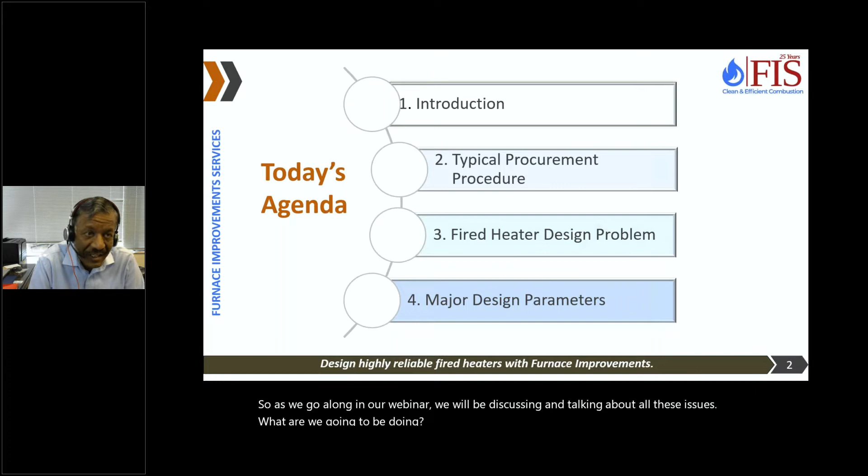So what are we going to be doing today? We'll talk a little bit about introduction, talk about the typical heater procurement procedure, and then we will talk about a real fired heater design problem. We will take a real fired heater design, and I will talk to you, and we will discuss the major design parameters, and then we will move ahead with that design, how we come up with the design of the heater.

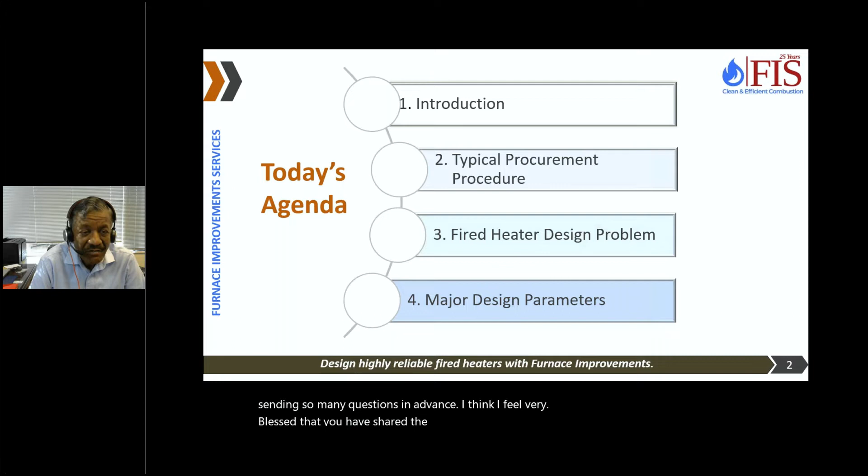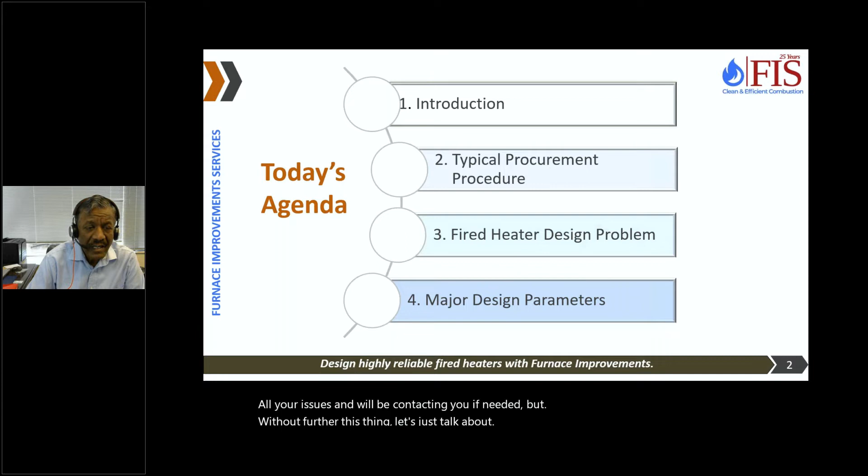All your issues, and we will be contacting you if needed. But let's talk about how the heaters are being procured today in most part of US and the world. So typically when you have a project, most of the projects are carried out by big EPCs, engineering companies, and they sometimes hire licensors.

And they come out with a front-end engineering design package, FEED, as it is known in the industry. And that is given to the successful EPC, and they are asked to develop a plus minus 10% cost estimate. So the EPCs take the data sheets which are developed by the licensors or the client, or by EPC themselves,

and they go out to the heater vendors and get the preliminary cost estimates. And these cost estimates are then taken by the EPCs to develop the project estimate. Once the project is approved, EPCs take those proposals, firm up their inquiries, and send the firm inquiries back to the heater vendors.

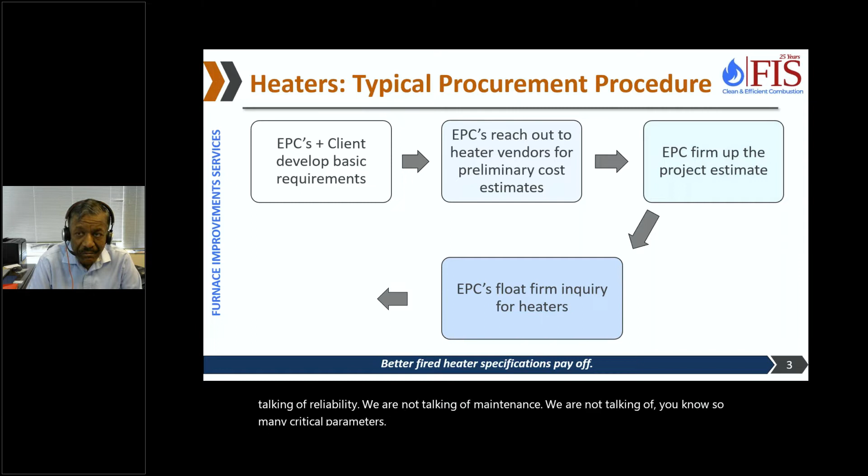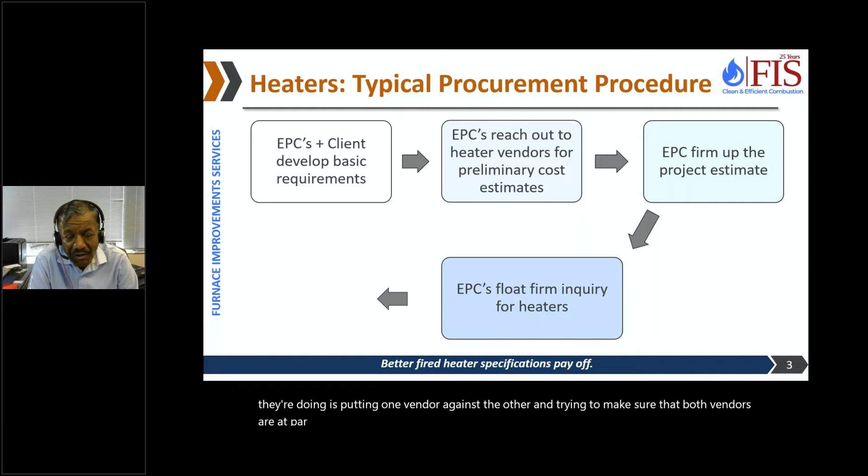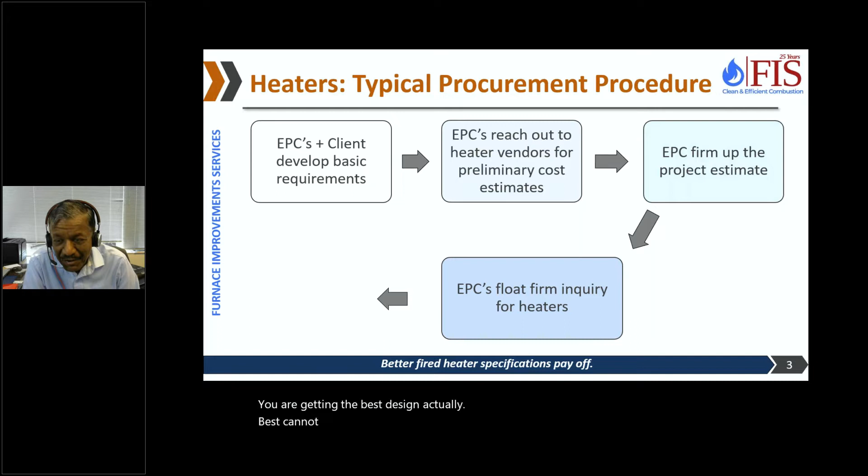And the most stress is on comparing one offer against the other. So typically what they're doing is putting one vendor against the other and trying to make sure that both vendors are at par. But that does not mean that you are getting the best design, actually, because best cannot be cheapest. There is no way, if you're buying a TV, Samsung TV is not going to be the cheapest.

So you have to make a compromise on the heaters, and then you end up paying recurring maintenance costs, which are much more as compared to the initial cost you save. So our approach is, get the design right the first time. Do it once, do it right.

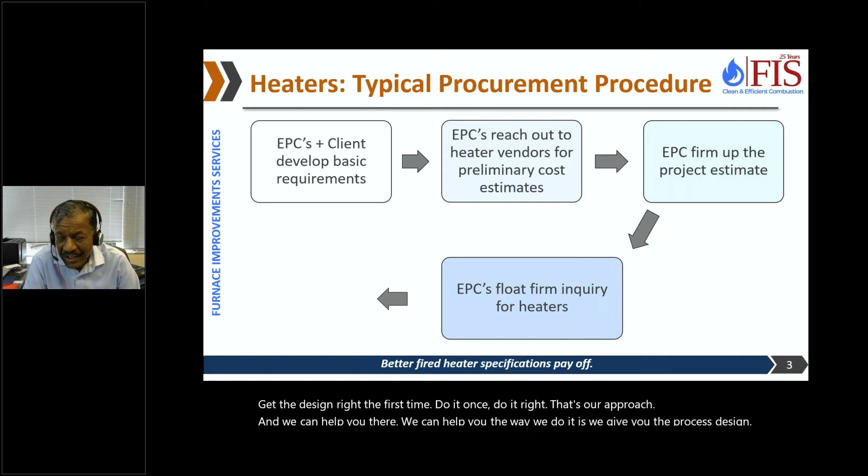That's our approach, and we can help you there. The way we do it is, we give you the process design, and then you can take it to any EPC or any heater company, and it will ensure that you don't get a cheap heater. You get the best heater for your money, actually.

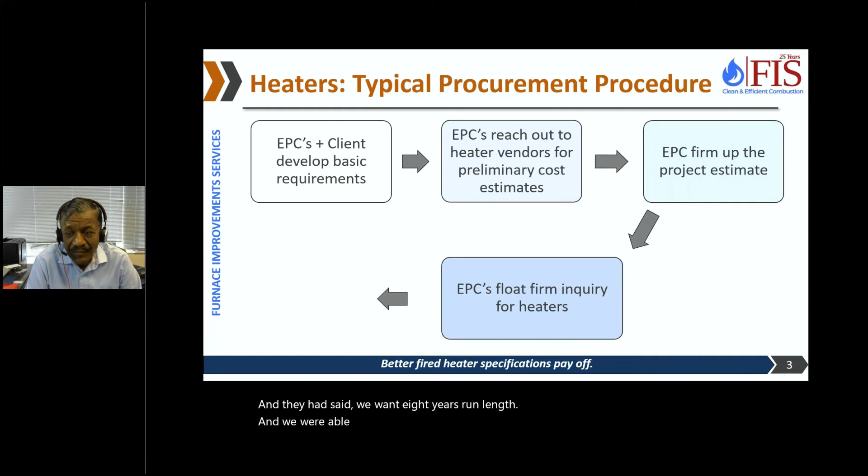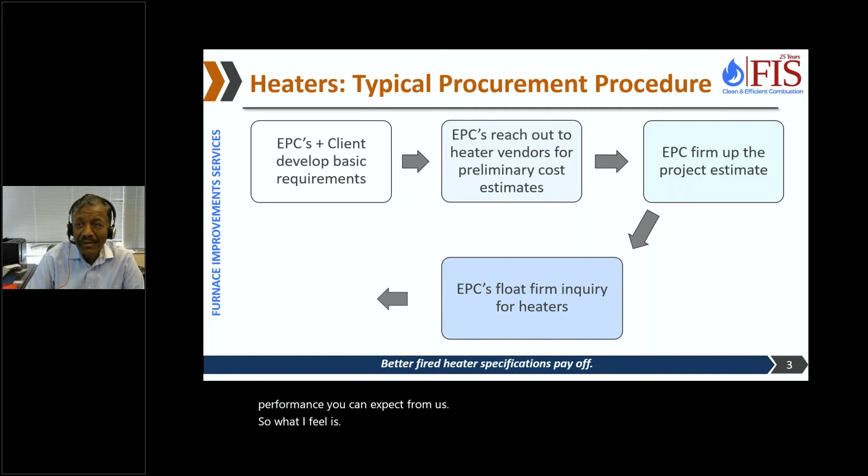We did a design for a crude and vacuum unit for Citgo, and they had said we want an 8 year run length. We were able to show them that the heaters ran for 8 years. That's the type of performance you can expect from us. So what I feel is, the procurement procedure needs improvement, and that's where we come in.

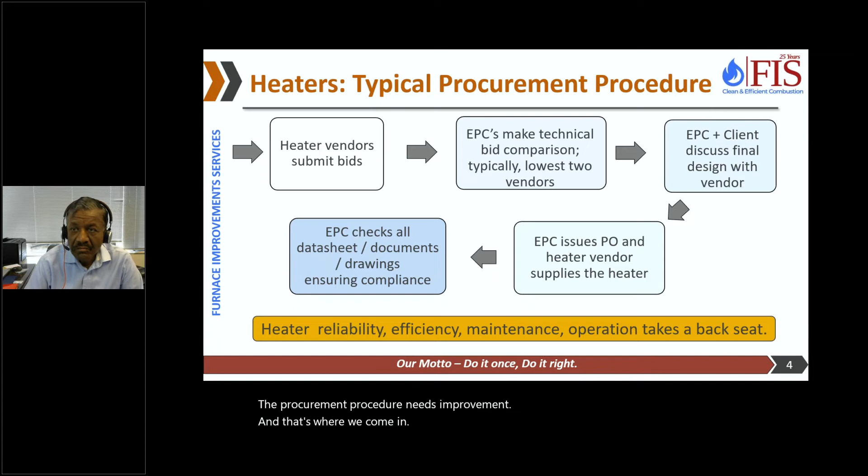So let me talk about our company, Furnace Improvements. We started in 1996. We have two offices, Sugarland, Texas, and a main office in Noida. The main office is where all the activities are taken care of. Our mission has been improving the performance of existing fired heaters. That's what we do for a living.

Basically, take your heater, improve their run length, improve the capacity, improve the efficiency, reduce emissions. Our model has been working directly with end users and owners, as we call it. It's a model which is like a patient-doctor relationship. We look at the patient and then we prescribe the medicine, and we have a very unique

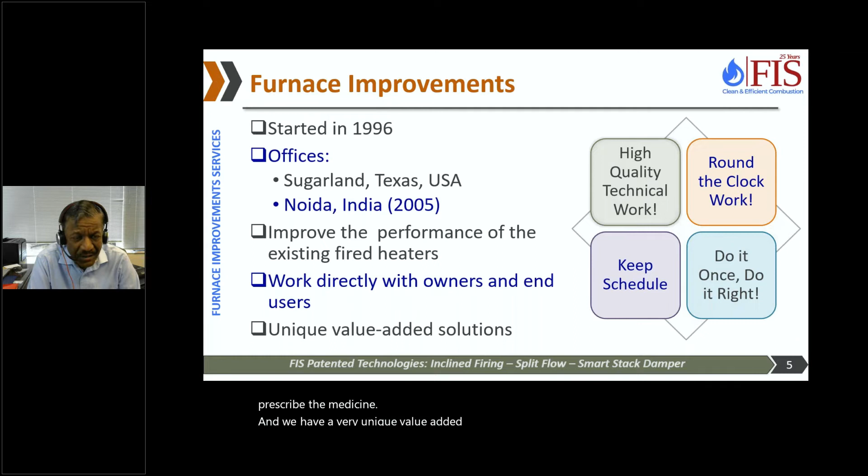value-added approach, and it is somewhat based on a contrarian approach. We challenge what has been done and why it has been done. So we have a kind of getting back to the basics and looking at the heater. If you give us a heater, we will look at the basics and see what has gone wrong in that heater. On that basis we have developed 3 patented technologies: inclined firing, split flow, smart stack damper. That's basically our approach to fired heaters.

And as I said, our approach is do it once, do it right. Because of the time difference, we are able to do the work around the clock, and we are able to keep schedules. We can do work schedules on a very, very fast basis.

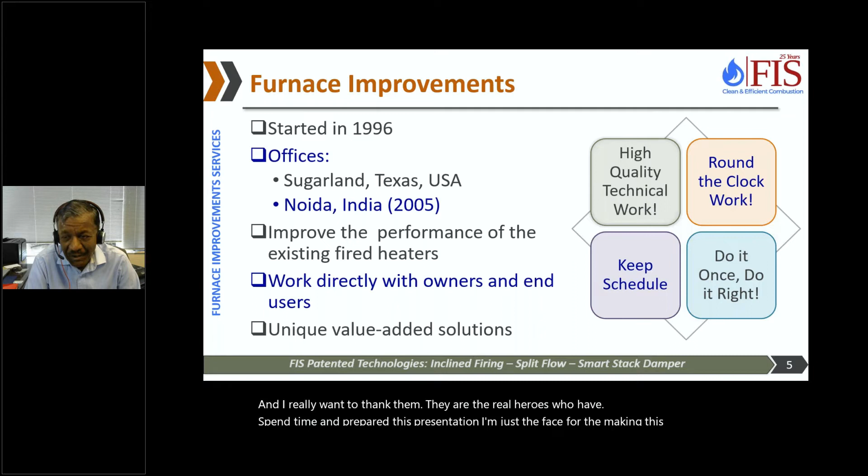As far as our capabilities are concerned, our forte is process engineering. We have in-house CFD modeling capabilities - I think maybe we are the only heater company with in-house CFD modeling capability. We do our mechanical engineering, structural design. We have SolidWorks for 3D modeling, and we can do your project from start to finish, all the way from design to erection. We can take the project.

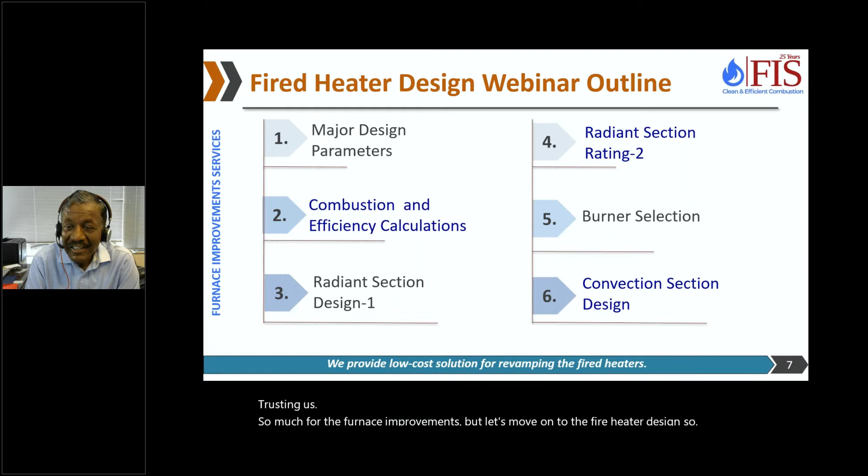Okay, so much for the furnace improvements part. Let's move on to the fired heater design. We want to go into details, and that's one reason I decided to break this webinar into 12 parts. We will start with the major design parameters today. Next month we will have it once every month, and that will give us time to prepare. It will also give you time to absorb and send us questions. You will need to register every time - we could not find a way that we could register you for all the webinars, so you will have to register it.

Next month, we will talk about combustion and efficiency calculations. Efficiency has always been on the back burner in the US, but now with greenhouse gas emissions, I think efficiency will play a very important role. We are already seeing many of our clients asking us to put their air preheater system back online, which had been bypassed for the last 20 years. So efficiency is an important thing.

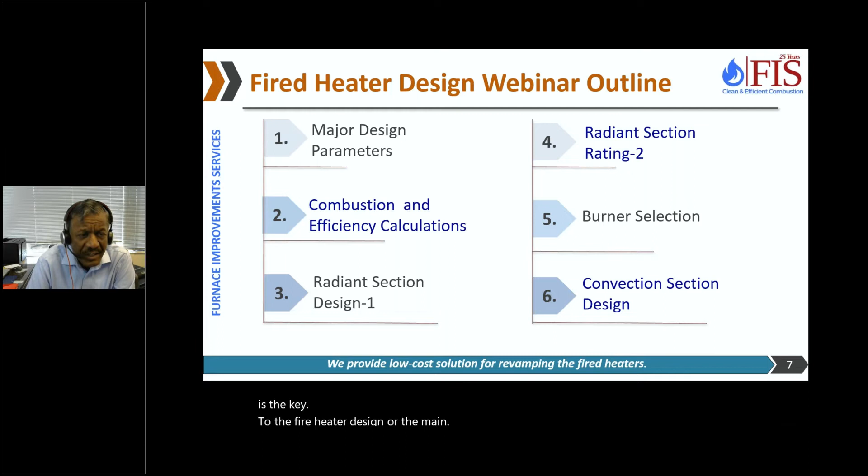Then in the third and fourth sessions, we will talk about the radiant section. We realized the radiant section is the key to the fired heater design - the major component in the fired heater is the radiant section. So we will take two sessions doing that. Then move on to the burners, I hope we will be able to finish it. Then we will talk about the convection section.

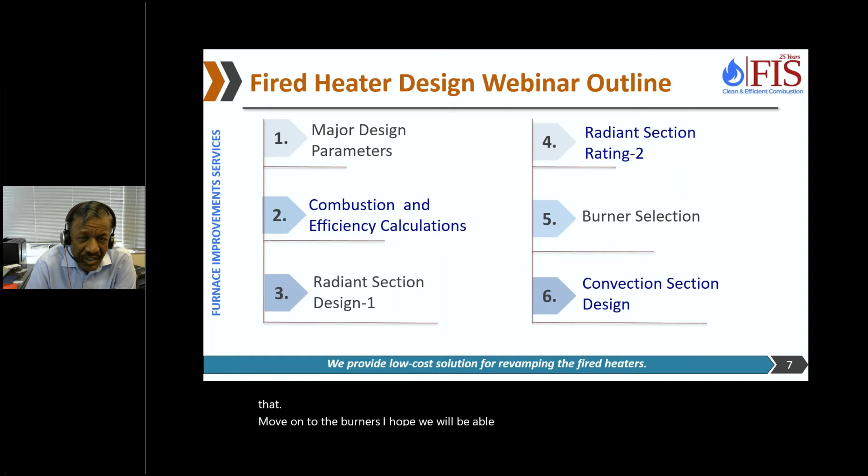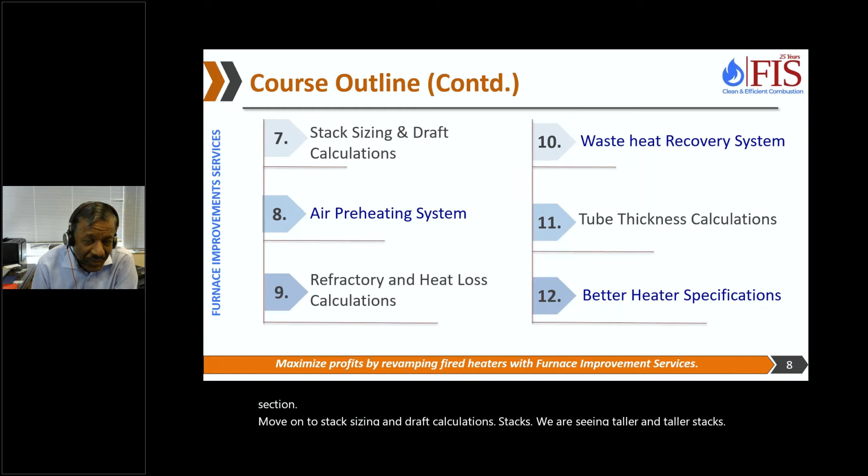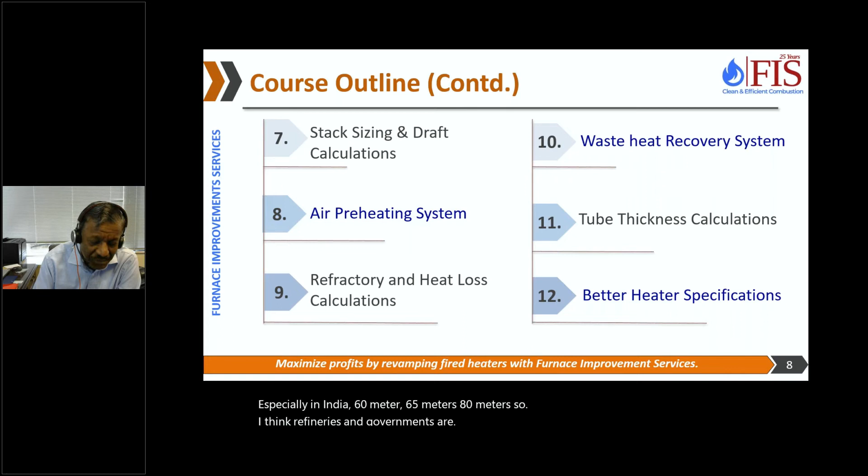Move on to stack sizing and draft calculation. Stacks - we are seeing taller and taller stacks, especially in India, 60 meters, 65 meters, 80 meters. So I think refineries and governments are taking cognizance of pollution, and that's a good thing. The taller the stack, the lower will be the ground level concentration.

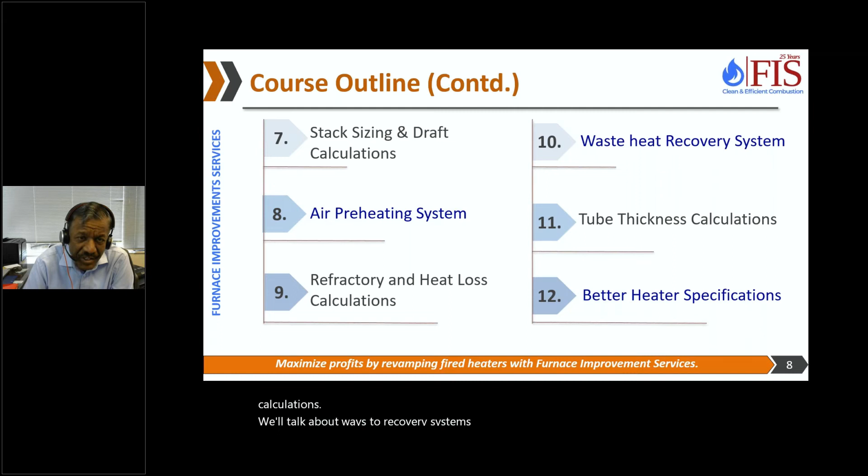Air pre-heating systems are going to make a big comeback because that's one of the most effective ways of improving efficiency, so we will talk about air pre-heating systems. We will talk about refractory and heat loss calculations. We'll talk about waste heat recovery systems, also like steam generation, tube thickness calculations. And in the last session, we will summarize everything we have discussed and learned, leading to better heater specifications.

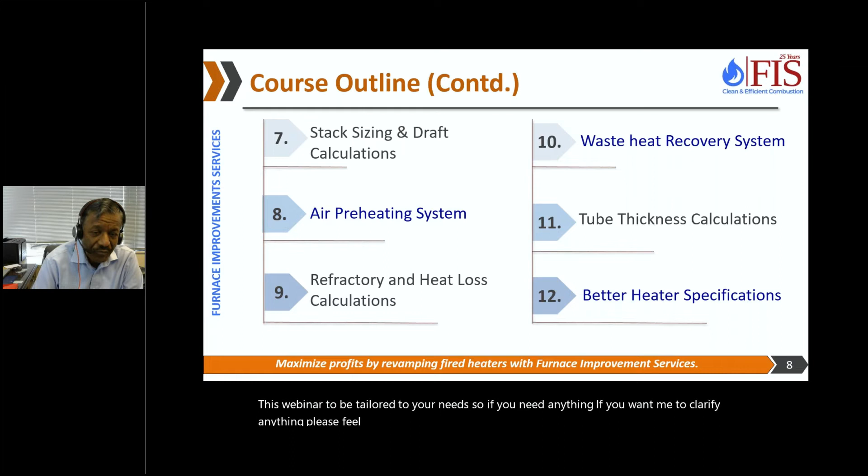I believe most of you know me actually, I think I don't need an introduction at this stage of my life. You know, I'm a chemical engineer. For those of you who don't know me, I'm a chemical engineer from IIT Kanpur, passed out in 1974. I've been working on fired heaters for almost 45 years. My plan is to work for another 5 years and complete, at least up to 2024.

I have been a member of API, AIChE, ASME. For the past 25 years, I've been taking care of furnace improvements. This is my third child, as my family says - furnace improvements is my third child. I've been taking care of it, it's almost 25 years old now.

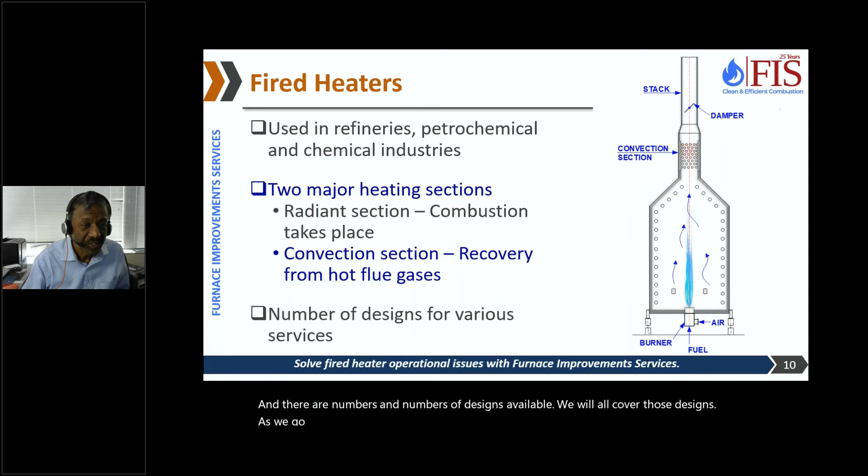Let's talk about major components in fired heaters. API says there are 21 components, and I think our team has shown a lot of components here. But as I said, radiant section, convection section, and the stack - these are the three major components. And then the burners, most important component from the operation standpoint or from the process engineer standpoint, even though burners in terms of expense are very little. They only cost 3 to 5% of the total heater cost, but that's basically negligible. In terms of operation, burners and stack dampers are two very important components in fired heater.

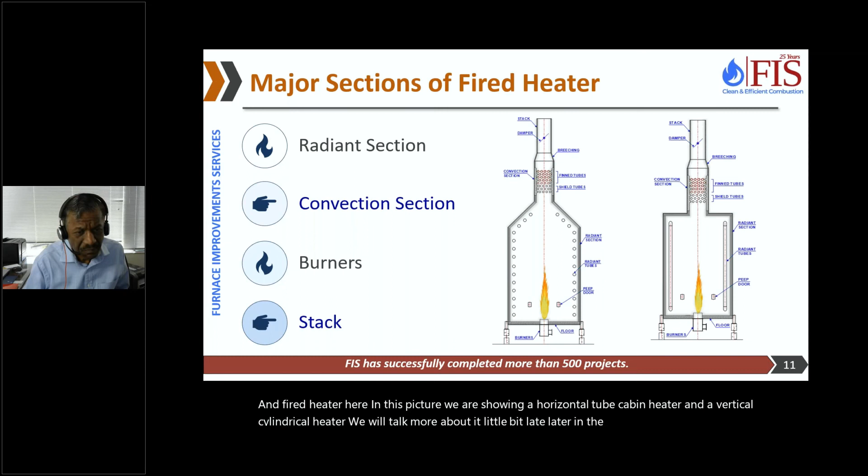So let's talk about types of heating - what type of heating we are looking at. Most of the time in fired heaters, we either have fluids which are hydrocarbons or steam. There could be some other things also, but we are talking mostly hydrocarbons or steam. And these fluids could be in liquid phase or in gaseous phase.

So there are two types of heaters. There is one heater in which there is no phase change taking place - that means liquid is going in, liquid is coming out, or vapor is going in and vapor is coming out. The example of liquid going in, liquid coming out is a hot oil heater. Vapor going in, vapor coming out - we can talk about the catalytic reformer heaters.

Those are the ones. Most of the heaters in the refining industry are of reboiler nature - that means liquid going in, liquid plus vapor coming out. And the examples are plenty: crude heater, vacuum heater, so many hydrocracker heaters. So tons and tons of heaters.

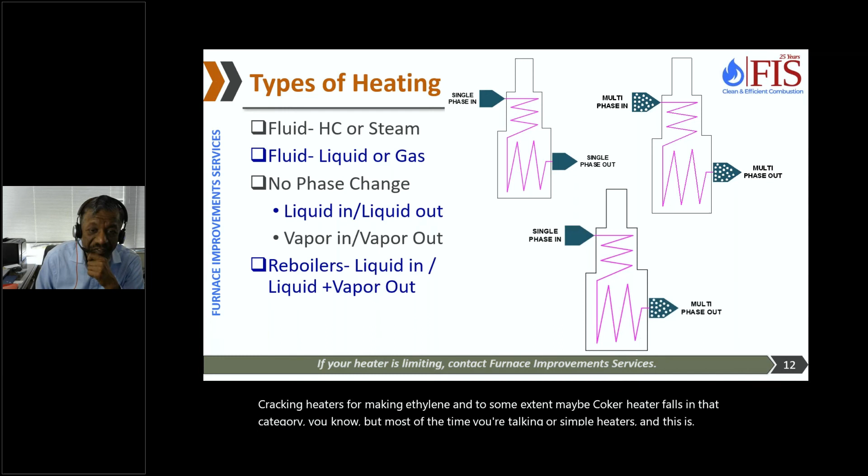But the third type of heating I'm not talking about here is where there is heating and reaction taking place - that means there is an endothermic reaction taking place and the heat is used for carrying out that endothermic reaction. Steam methane reformers, cracking heaters for making ethylene, and to some extent maybe coker heaters fall in that category. But most of the time we're talking of simple heaters, and this is what we do as far as the classification is concerned.

So let's talk about how fired heaters are designed. Fired heaters are always custom designed, and each one is tailor made to meet the customer's requirement, site requirement, process requirement. So there are so many things - very rarely will you see a repeat of fired heaters.

I want to tell you, I think 30 years ago I used to work for a heater company, and they got an order from Mexico for 2 heaters. And we thought we would be able to provide identical equipment. But once we received the data sheets, it turned out that one of the heaters was to be located in Tula, Mexico, and Tula is at about 6,000 feet elevation. The other was at sea level. So just the elevation of the site makes a big difference in the heater design, actually. So even though they both had the same parameters, the heat duty and everything else, same fuel type, but their design was different.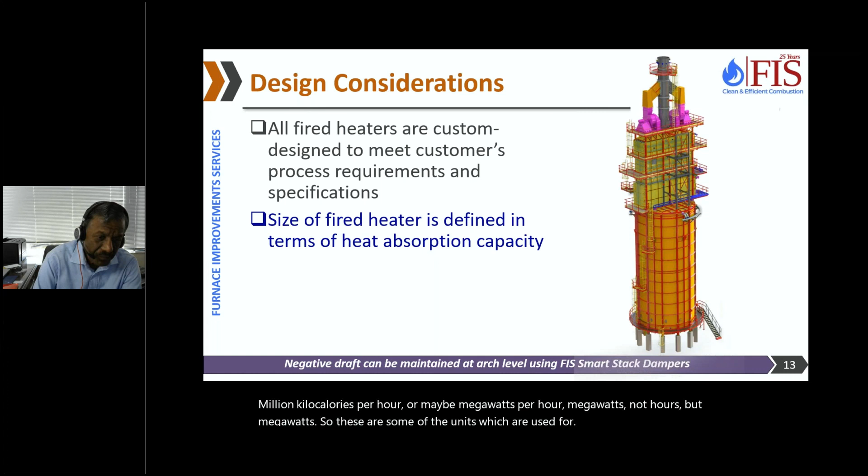So let's talk about the most important parameter for fired heaters. Most of the heaters are defined in terms of heat absorption capacity. We measure heat absorption in million BTUs per hour. If we are talking of metric units, then it's going to be million kilocalories per hour, or maybe megawatts. So these are some of the units which are used for heat duty.

So let's talk about the first parameter we need to know - how much heat duty is being transferred. The duty is generally specified by process engineers. Now, the heater could be supplying heat for a reaction, so start of run will be different and end of run will be different, at the catalyst.

Similarly, if we have a preheat exchanger train upstream of the heater, there also start of run may be different. When the exchanger train is clean, it will be preheating more. When the exchanger train is fouled, it will be lower inlet temperature. So when you are specifying the heat duty, you need to think about how much margin I'm going to keep.

Because you are not going to be building fired heaters every 5-7 years. Most of the fired heaters are built for 50 years. So even though technically the design life is 20 years, there are heaters which are 50, 60, 70 years old still operating.

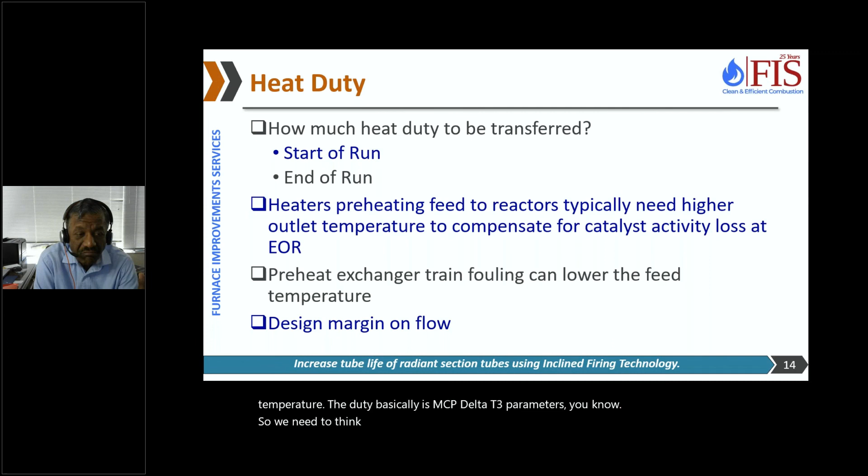Next thing you want to talk about is the design margin on the flow. Today my crude unit is operating at 50,000 barrels per day - what will happen 3 years from now? Am I going to be increasing my charge rate to 60,000, 70,000 barrels per day, or what's going to happen? So just think about the margin on the flow, on the temperature. The duty basically is MCP delta T - 3 parameters. So we need to think about charge rate and the temperature difference.